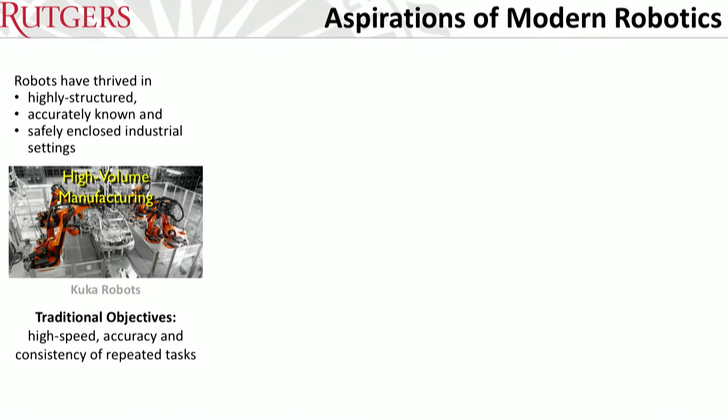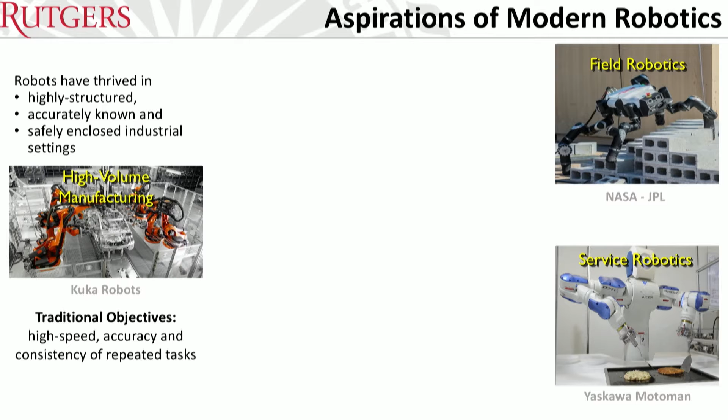I think most of you and most of us in robotics these days were all part of this effort to transition our field from the traditional setup of high volume manufacturing, where the traditional objectives are high speed, accuracy, and consistency of the repeated tasks. We want to put robots into the field, and into our homes. And I think the current commercial applications that attract quite a bit of interest, autonomous driving and logistics, are stepping stones we have to solve if we want to eventually go into the field, or the jungle that our homes are for robots.

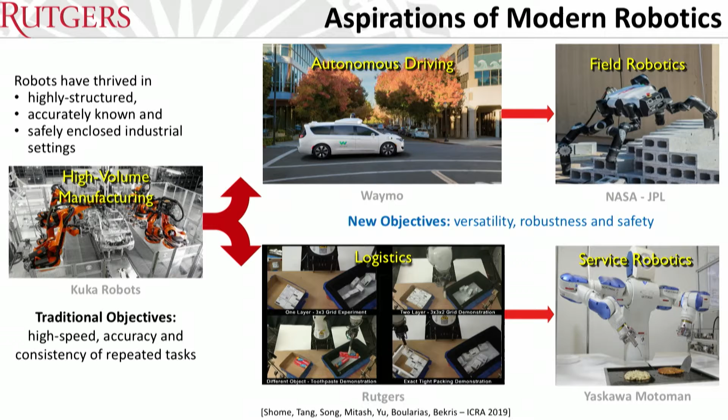Especially in the case of logistics, which I have been working on over the last few years, I think if e-commerce was not a big business by itself, roboticists should have discovered it to make progress with robotics. It introduces some of the complexity we may face in service robotics. There is a very large variety of objects you may have to manipulate, for instance. At the same time, it is a little bit easier. There is some structure. You may see objects on a conveyor belt. So we kind of get access to a lot of data these days and the ability to build systems that perhaps eventually will go to much more unstructured setups.

I was inspired to get into logistics because back in 2015 there was the Amazon Picking Challenge. It was posed as a competition for the academic community. We had to pick items from these shelves that are very dark—you see that they're actually kind of metallic. Given the six to seven months we had available to put together a system, we went with the textbook approach: we're going to sense, we're going to plan, and we're going to act, and then we're going to cross our fingers, and everything is going to go well.

And what can go wrong, right, with sense, plan, act? Well, everything can go wrong. Perception may not return you the correct answers. There is noise. Your planning may not discover solutions when they actually exist. Your execution may be erroneous. So we have to think here how we put those components together.

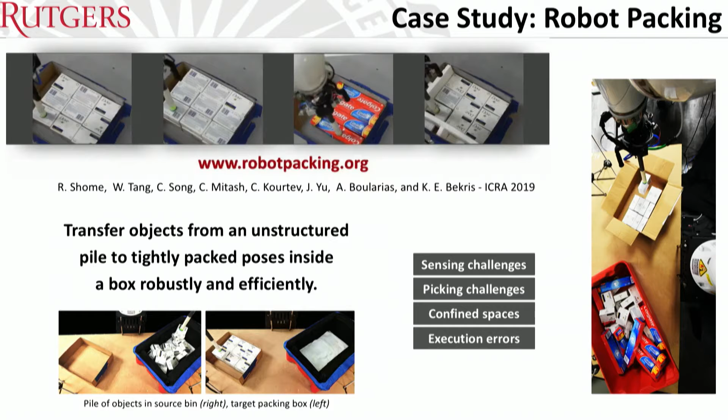Specifically in this domain, one of the challenges is that you have a lot of similar objects and many instances of the same object in these dense, unstructured piles. So we tried to come up with solutions for solving these challenges.

And again, one of the limitations in this context and with 6D pose estimation is that you do not necessarily get labeled data in a very cheap manner, at least in the real world.

Actually, after the Amazon Picking Challenge, I asked one of my students to put together a data set, which is now known as the Rutgers APC, the Rutgers Amazon Picking Challenge data set for 6D pose estimation. He put a lot of effort over that summer into measuring the position and orientation of objects inside the Amazon shelves so as to have ground truth information. And then he gave up the PhD because he said, if that's what I'm going to be doing with research, it's not very exciting. It's a very useful data set though, you should use it.

So we went into this domain of trying to come up with pose estimates for the objects. And some of the challenges here is that because they're very similar, you kind of need to understand where the boundaries of them are, and we didn't want to go into any such painful labeling process.

We're big supporters of training as much as possible in simulation. So we train in simulation where labeled data are available. But then you have to close the Sim2Real gap in terms of the perception side of things. We get a lot of labeled data in simulation where we know the semantic segmentation and can come up with the boundaries, plus a lot of examples of real scenes we want to apply in this domain. Through an adversarial learning process, we can close the gap to make predictions on real images that are trustworthy.

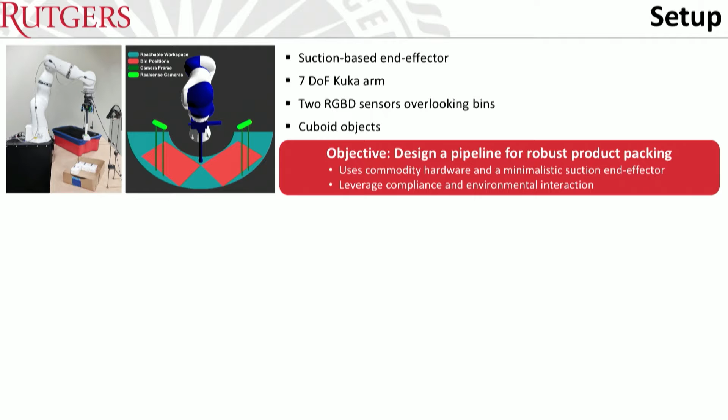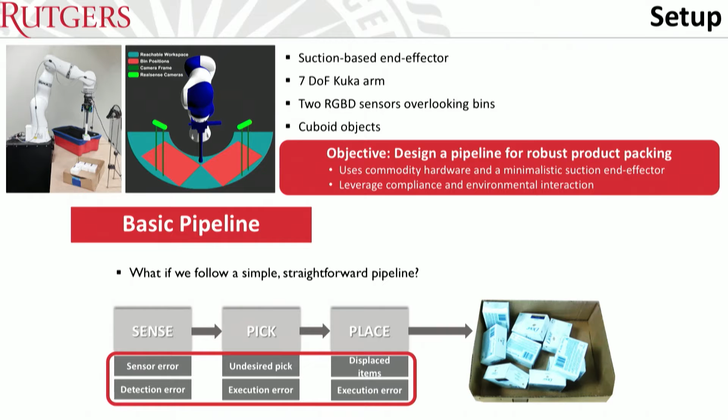We use this as input into our process for performing manipulation, using just a suction gripper. I tell Aaron Dollar, the expert on compliant end effectors, that suction grippers are a great example of compliance, and he gets upset and disappointed with me as a collaborator. But actually suction grippers are soft - you can push a little towards objects and it won't destroy your scene. I think it's an example of where compliance helps in this case too.

Our first attempt was: we need to pack items in a target bin. We sense the pick scene using the technique I described, which gives very good pose estimates, pick the objects, then place them directly where they need to be at the target bin to achieve packing. And of course, what can go wrong with sense, plan, act?

Many things go wrong even in this setup where we pushed hard on high accuracy perception. For instance, you may want to place an object on its larger support area, like with these soaps, but what the object looks like in the pick scene is the other orientation, the shorter side. With a suction gripper you don't have dexterous manipulation capabilities - you can't easily reorient the object before placing it. So how do you place it with the desired orientation when you picked it with the opposite orientation?

That's where you can use the environment as an additional finger, thinking along the lines of Matt Mason and Alberto's kind of thinking. You could actually topple objects inside the pick scene just with your suction gripper, and it turns out having a compliant base for the environment allows this toppling operation to work much more reliably. So we start introducing these planning fallback solutions every time we face a problem in our pipeline.

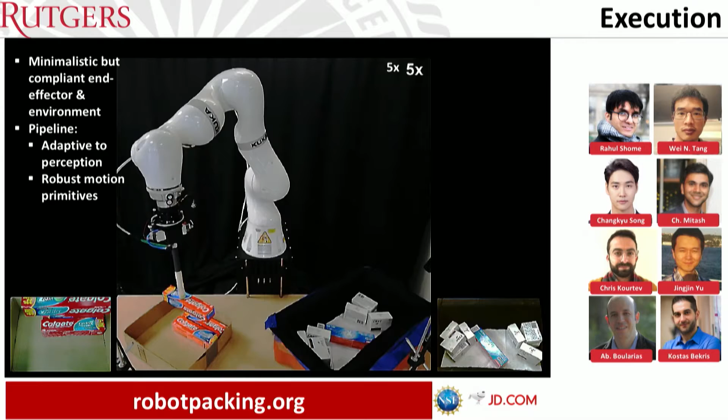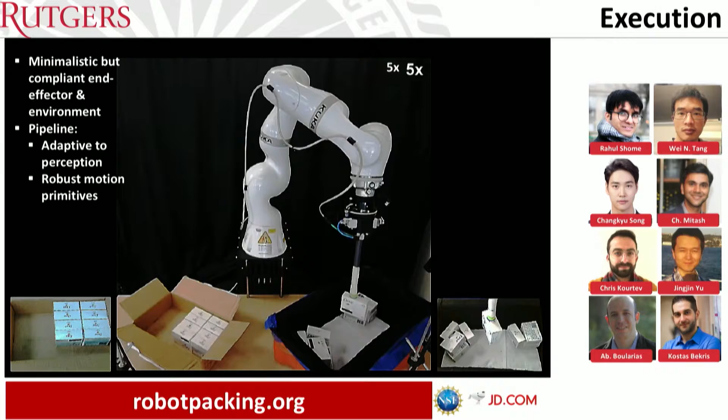Interestingly, for the Dove soap, one of the reviewers on our paper told us, well, you've shown a lot of examples where you place the Dove soap on the stable, large surface—what if you have to place it on the short surface instead? So we did some tests, and here we're placing them onto the smaller surface. We're lucky that some of the objects in this situation are already exposing this small surface, so we don't have to do any toppling.

We place them in the target area, and you can see the adaptive pushing: we go a little bit off, and then we push every time towards the other objects. The next pick is a situation where we pick an object not from the right orientation, so we also have to perform some toppling. It finds an empty area at the bottom of the pick scene, reorients it, raises it in this situation, exposes the right side, and then does pick and place, still with adaptive pushing.

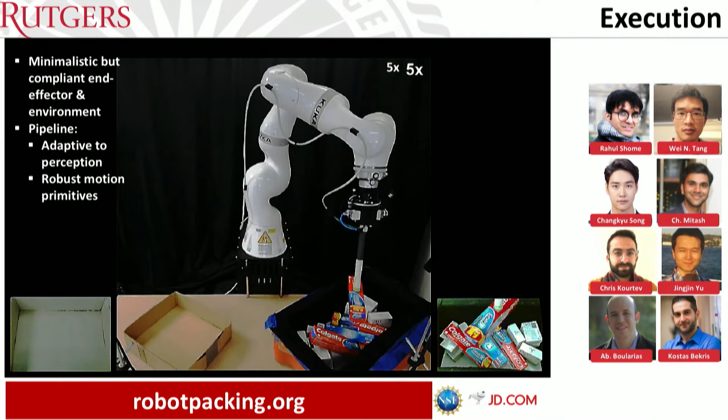This pick failed—it was not very nicely aligned. The next one is aligned. If you're using suction cups, you apply a lot of flow to try to pick as many items as possible in the scene. So in this setup, we have these fallback plans that help us adapt to situations where the happy path may not work.

At the same time, our sensing is very snapshot based—we observe what is happening in the pick scene, we observe the place scene, and we figure out if something went wrong. But manipulation is a much more dynamic process. I mentioned the compliance of the suction grippers: when you pick something, objects move quite a bit, especially with the adaptive hands we're using from Aaron's group. Because they are compliant, you do not have very good forward kinematics to know exactly where the picked object is located.

So if you want to place it in a tight area, you want to have an idea of the pose of the object at the time of placement. And as you place, you may have contacts—what happens to the pose of the object during the contact? What if I want to do insertion in a tight area? So we need to keep track of the poses of these objects much more dynamically.

So we first focus on the setup where we manipulate objects picked by adaptive hands, in situations with significant occlusion. There is a manipulated, textureless object inside the adaptive hand that is hidden quite a bit relative to the static single RGBD camera viewpoint we have. We come up with ways to initialize a pose estimate for where the object is, simultaneously detecting the hand configuration from vision to inform us about the configuration of the picked object.

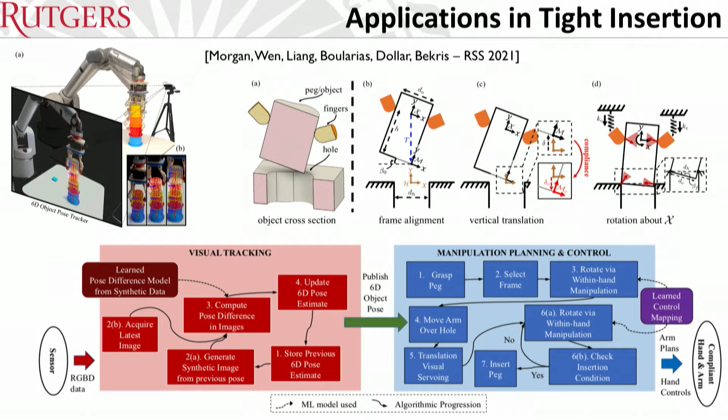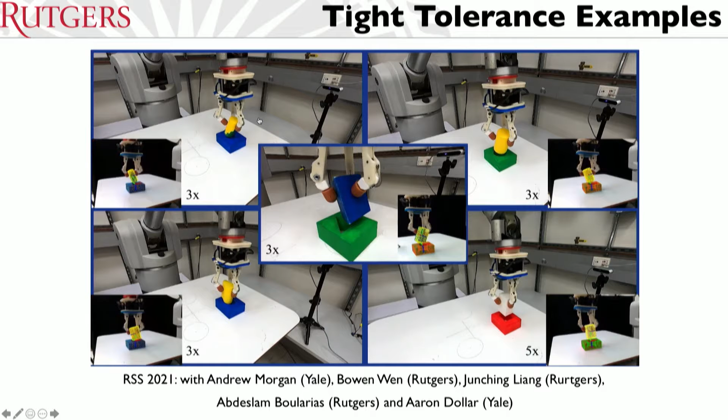So we were trying then to move the object so as to follow this kind of high-level plan by observing where the object is and where it should be. And this allowed us to start solving these problems for a variety of objects. So these are kind of standard shapes. You see the predictions of the visual tracker while this is being executed, and we're using the adaptive hand to perform the operation. And again, the video here is 3x, 5x, depending on the object. But the opening, again, is sub-millimeter bigger than the actual object.

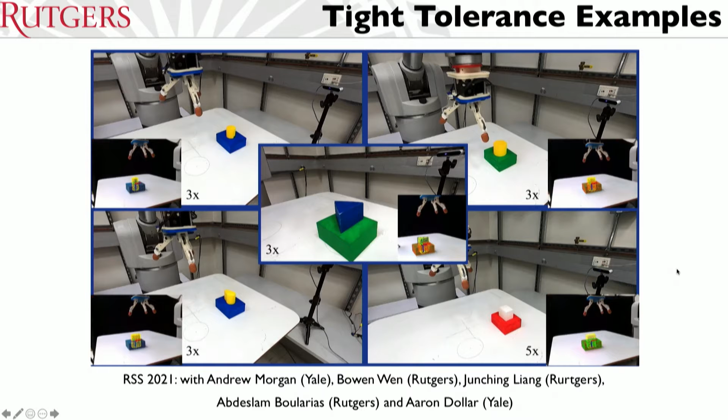And we were interested to evaluate what is the most critical aspect of this system, because it brings together multiple things. You have a compliant hand, and Aaron's argument was, well, it's the compliance, stupid, right? That's what solves the problem. It's my hands, right? And there are other arguments here as well. Is it the fact that you have this closed loop operation and the fast response from the controller because you have the fast visual tracking? Or is it the fact that the vision is accurate enough that you can solve this problem, and if you had more erroneous measurements, you would not be able to solve it?

So we did this ablation. This is, for the types of objects that we tried in our experiments, the success rate over experiments. And then on the right-hand side, it's a table with a number of successes where first we reduced the level of compliance in the system. So the experiments that I showed before were executed at Yale with a compliant arm, compliant hand, and a compliant base for the receptacle.

And at Rutgers, we repeated that by removing compliance from the system. Right? What if we have a rigid arm? What if we have a rigid hand? What if the environment is also rigid? And as you remove compliance, the success rate goes down. So compliance does help to increase the success rate. So Aaron has a point here.

The other thing we did was slow down the reaction of how frequently we update and move the object relative to our observations. And I think predictably, this is the one that has the most catastrophic result. We go from close to 10 out of 12 successes to very quickly going down to 0 if we are slower at updating the poses, or if we try to do an open loop control where, okay, I guessed how I picked it in the beginning, I assume it's going to remain constant during the whole operation, and then I just follow my plan.

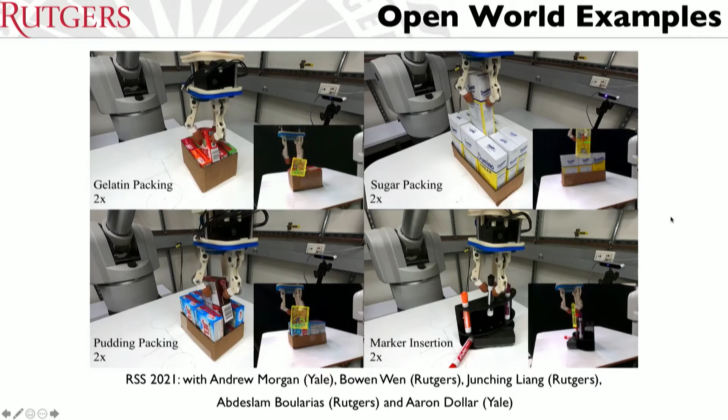Possible architectures for your SE3 tracking. Is there a reason, is there any intuition for why you like the pose refinement setup? Is there something about that that worked particularly well?

It's very simple, and I have to say I didn't like it myself. Bowen persuaded me. I thought it wouldn't work because we would see drift. But the predictions of the network, trained with the labels from simulation... we first tried switching from simulated data directly to real data, previous scene and next scene, and it was also having high error. As soon as he switched to getting one of the images to be simulated, the error was small enough, and we were not seeing an increase in drift.

And the fact that it's just a network makes it also fast, and given how much you have moved at the next step, you are still in the vicinity of the previous estimate, so things are working nicely there. But for generating the simulated scenes as training, we need to train over the models, right? So we do need models.

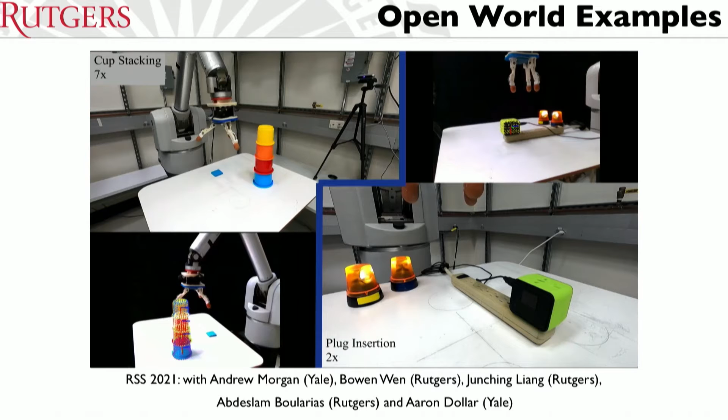First of all, pose estimation for unknown object models is a little bit of an ill-posed problem. What does pose mean if I don't have a model of the system? The best thing that you can come up with is relative transforms between frames. So you can say that if I have a segmentation mask in the initial scene that tells me this is the point cloud that I'm interested in tracking, I'm going to give you estimates of how this point cloud moves between consecutive frames.

Now, if for the first frame you have some way of coming up with a global transform relative to a frame in which you're interested in figuring out the position of the object, then you can just compose and know the pose of the object everywhere. Right? But otherwise, because I do not have a model, we cannot really talk about pose in a global frame.

All right, so how did we try to solve this problem? The first part of the pipeline is similar to what I described before. It's a neural network that is going to come up with an estimate of the change in the pose between consecutive snapshots of the object. Right? We cannot use simulation here as input because we do not have the object model, so we're not going to be able to hallucinate it in this way. So we're using real images as inputs.

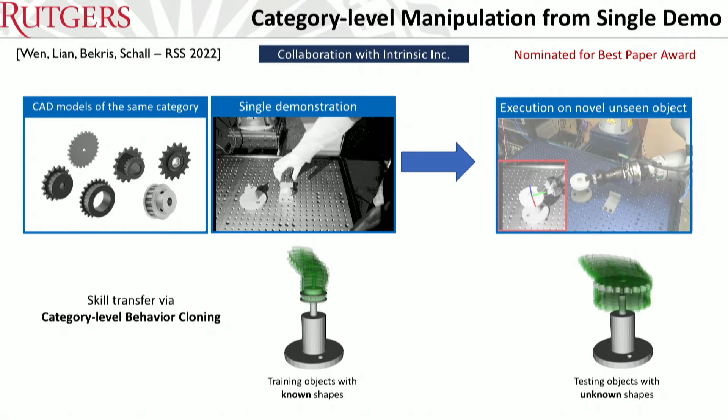So I'll run the video here on the right. This is a different type of gear that is being manipulated by the robot that has not been seen before. And it's trying to match the demonstration trajectory from an object in the same category. And you see its execution. So we're trying to kind of clone this trajectory, although you're actually going to be executing it on a different instance from the same category.

So how does this work? This is kind of the high-level system pipeline. I'm sure it's overwhelming. Let me try a little bit to decipher what is happening here. Well, first, we're going to have this demonstration video as input, right? And things are going to be executed online. And we're going to use this tracker that I just described without knowledge of object models in both situations, both to track how the objects get manipulated by the person, as well as how it's going to be manipulated by the robot.

Now, the challenge is how we're going to be transforming the demonstrated trajectory that the tracker returns to where the new object should be, given the changes in shape between the two objects. So we have to kind of have a way of mapping a trajectory within the category. So the choice that we have to come up with is how to think about this mapping.

And for this purpose, we are using a representation we refer to as non-uniform NOCS. NOCS, I think it was proposed by Shuran's and Leo Guibas's groups, corresponds to normalized object coordinate space that kind of describes a six-dimensional space, position and orientation, for the category of objects. If I observe a point cloud for one object and I observe a point cloud for another object, it can give you the poses of these objects from different instances in the same category in kind of a common frame.

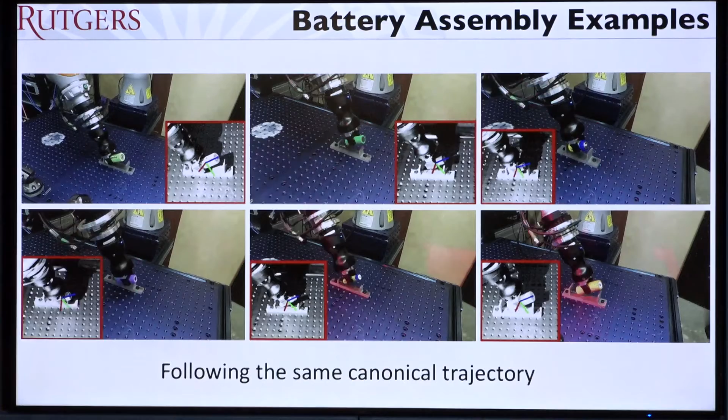So you can see here some examples where we just demonstrated for one battery, right? That was part of our CAD models, and now this is executed on different batteries that we had not seen during training. It's actually the same canonical trajectory—you see the same type of behavior being applied to all of these batteries.

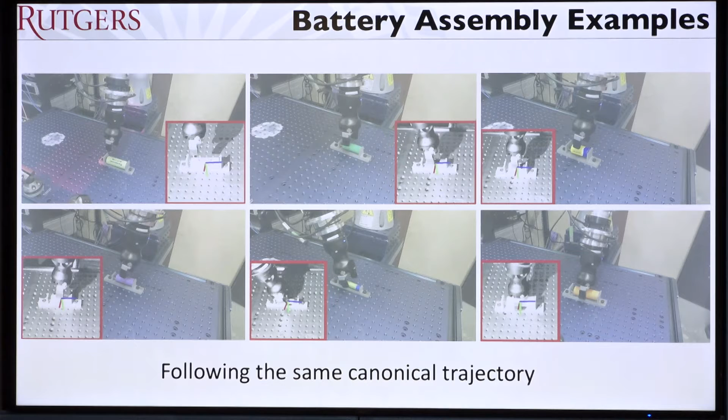So the second part, I don't know how I'm doing on time, is a little bit smaller. But let me know if you have any questions in this context of tracking 6D poses and manipulating.

So when you map the trajectory, are you, per time step in the demonstrated trajectory, mapping each action that corresponds to wherever your current time step is on the execution?

So I was really excited to work on this part, and I thought that's my time where we're going to do planning and control, and it's going to be something really sophisticated that's going to solve the problem. And Bowen told me, no, I just follow the next point on the trajectory, and it works. And I was like, how could it be? It ended up being what's called follow-the-carrot following—so the next point that is closest to where you are right now.

Any other questions?

So I have been using in this line of work adaptive hands and soft adaptive hands. Let me talk to you about another compliant mechanism that we have been working with, and it's not in the manipulation domain.

It's primarily used for locomotion strategies. I learned about this type of robot through NASA collaborators, who have built this tensegrity robot. If you think in terms of its surface, it's an icosahedron. It has 6 rods and 24 cables. It's a high control space system, and they're excited about it because it can navigate over uneven terrain.